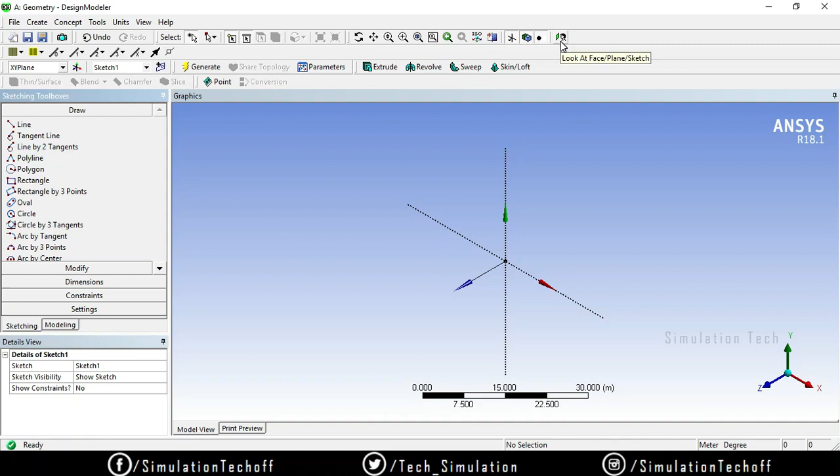Before that, my plane is oriented into an isometric view, so I need a normal view. I have two options. One is I have an option to look at face over here, so just click over here to change the orientation into a normal mode.

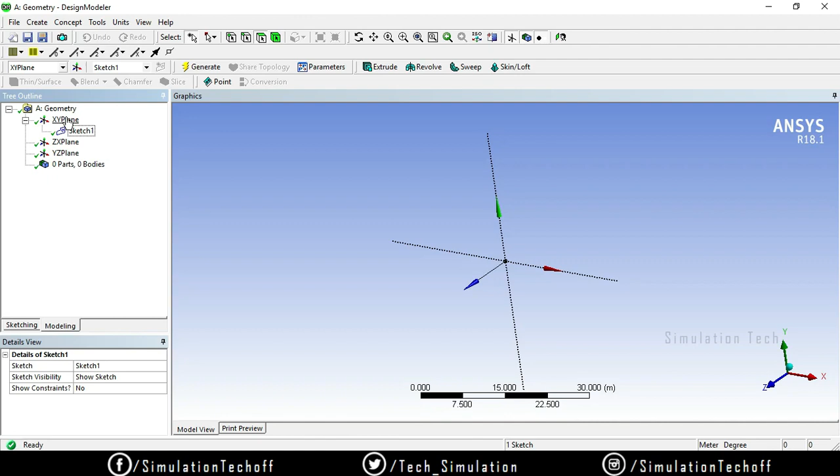Or else, if you have another orientation, just click the perpendicular axis. Here my perpendicular axis is the Z axis. Just click on the Z axis and you can get your normal position. Or else you can go to the modeling tab, click the plane, right click, and you have an option called 'look at'. Either method you can use to get your plane as a normal one, and go to sketching and click on line.

A single line command is used to make a single line segment, like so. I can draw this line using two methods. One is the normal method: starting point and ending point, starting point and ending point.

Or else I can use the drag method: starting point, drag the line, and release the button you pressed on your mouse. You can draw multiple line sections this way. This is called the drag method, so however many lines you need, you can draw.

One more thing to notice is whenever I place my cursor over the axis, you may notice a symbol called C, which means this line will exactly coincide on that axis. So I can coincide this line on this axis and then end it over here - that is also possible. That's why it shows the symbol called C.

C means coincidence. Whenever you place your cursor over a point, it prompts you with a symbol called P, meaning that particular line will coincide on that particular point. That's why it shows as a P - that is called point snap. This is called coincidence.

Another thing: whenever you draw a line that's slightly horizontal, it shows a symbol called H. If you release your cursor, it forms a horizontal line with no deviation. Similarly, if I make a vertical line, it shows a V - meaning however the line may be distracted, when I release my cursor it should be a vertical line, because the V symbol gets added, indicating the line will be created as a vertical line, or else it's created as a horizontal line.

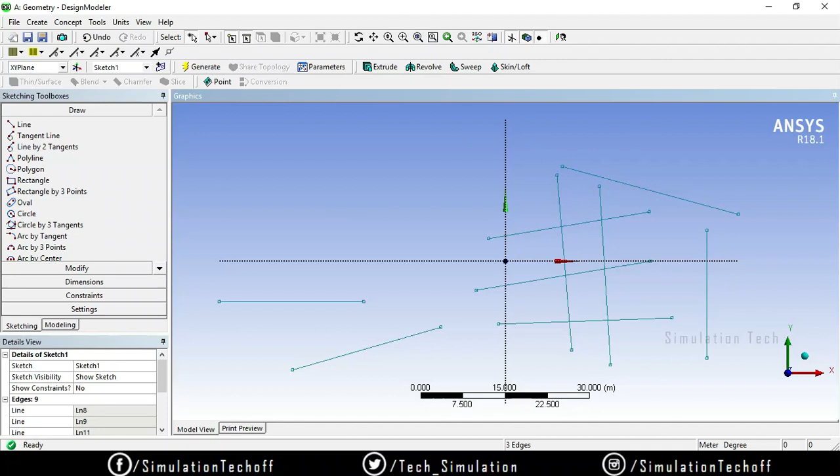If you want to delete the whole items, go to the modeling tab, select the whole sketch, right click and delete. It prompts you to delete or not, so just say yes, and the whole sketch entities will be deleted. Then select the plane, say new sketch, and come back to that sketching option. Here you have an option called tangential line.

For a tangential line you need a curved surface or a circle, so we have an option called circle. Whenever I click the circle option, it prompts me to select a center point, which may be whatever point you need. Just randomly select the point, and then select the radius or diameter of the circle.

After drawing the circle, you can change the dimension value using dimension tabs. We will see how to change the dimension values in our upcoming session. So just follow the functionality of the tools which takes place in draw tools.

So I have a tangential line option. All I need is to select a single point over the circle, and after that give the length of the line. This line should be exactly tangential to the circle at that point. Whatever point you select, a line will be created which is tangential to the circle at that particular point.

Okay, so line by two tangents. For that you need two circles. If you want to create a line which is tangential to two circles, that is also possible.

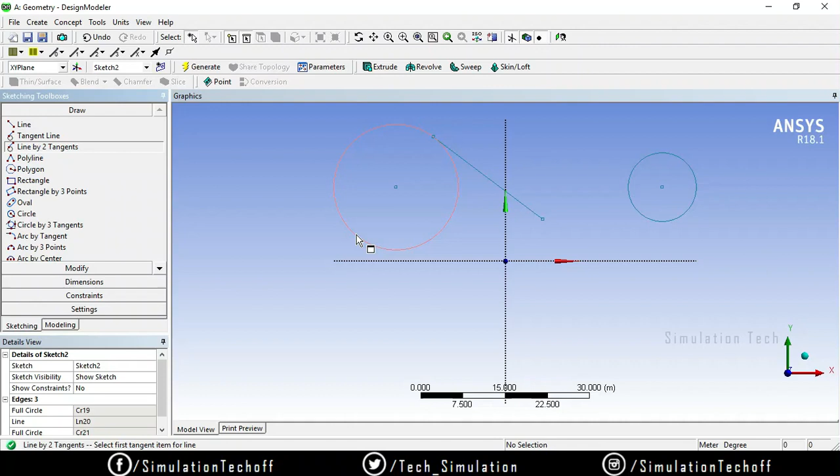So I can go to circle and draw another circle over here. I want to draw a line from here to here which is tangential to this circle and this circle. I can go to the line by two tangential option. It prompts me to select the two curved surfaces. So this is my first curve and this is my second, and after that it creates a line which is tangential to this circle as well as this circle.

And the next option is polyline. A polyline is used to create multiple line segments. While using a normal line segment, I can only create a single line, so I cannot draw a continuous line segment. For that we need the polyline command option.

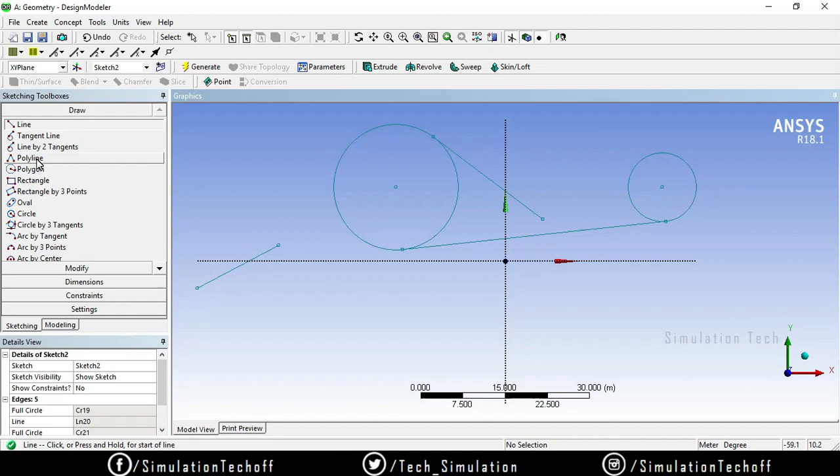Before entering into that, I just clear all the sketches over here. Right click and say delete, so the entire sketch will be deleted. After that, just click on the plane and say create a new sketch. Go to the sketching option, polyline.

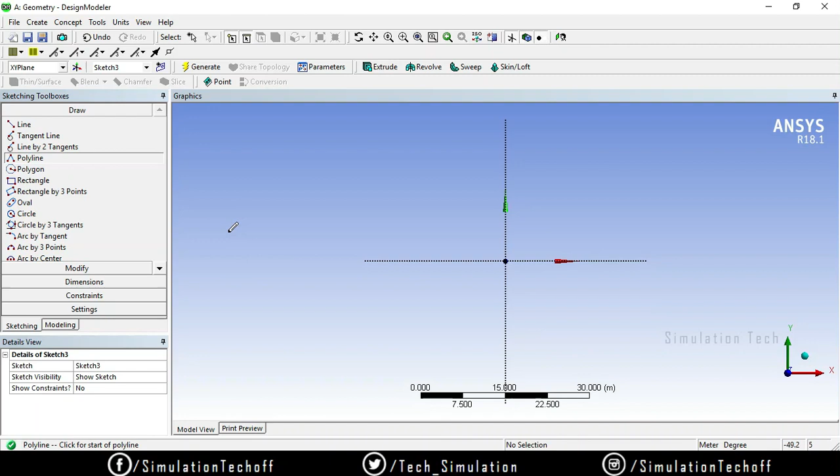Okay, so look at face. From here you can create polyline segments. So again you have two options over here: either you need an open end or a close end.

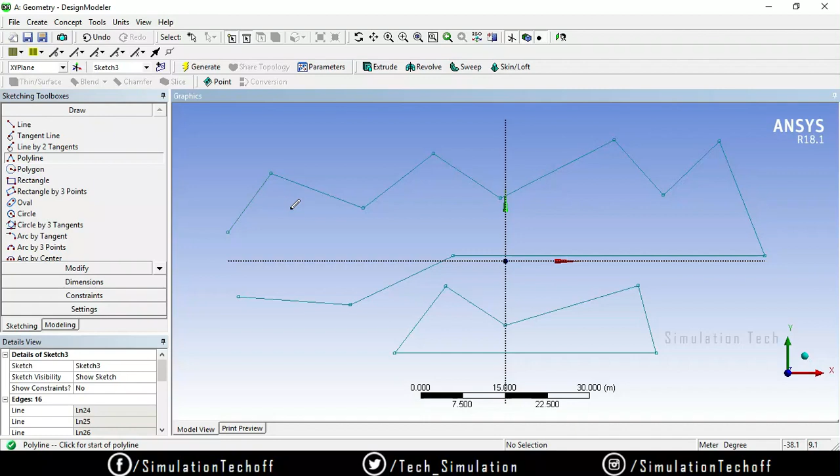An open end means this sketch is not closed over here. A close end means wherever the sketch is started, that sketch will be enclosed as a closed loop. For that you need to right click and you have two options: one is open end and another is closed end. Right now I need an open end, so if I say open end, the sketch will end over here. If I say right click, closed end, that sketch will be closed exactly where the point actually started. So by this way you can select either one way, either a closed end or an open end.

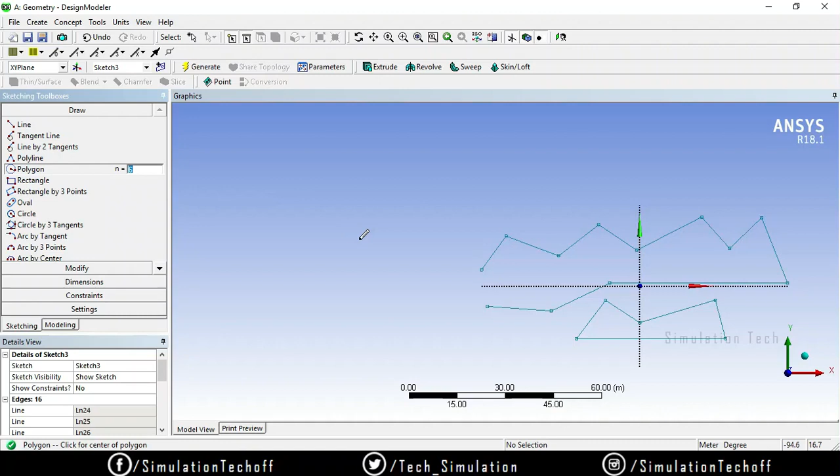After that you have an option called polygon. A polygon can have three sides or more, so whatever the number of sides, you can set it from here. By default, 6 is given. All you need is click the center point and okay, so a polygon will be created. If I change the value to 10, a 10-sided polygon will be created. The maximum sides you can give here is 36.

You can't go beyond the 36 value, because if you go beyond it, it will be converted to a circle. See, this polygon is created with 36 sides, but it still looks like a circle. In AutoCAD itself you can give up to 1024 sides, but in design modeler it prompts you to select up to 36 only. So that is all about polygon.

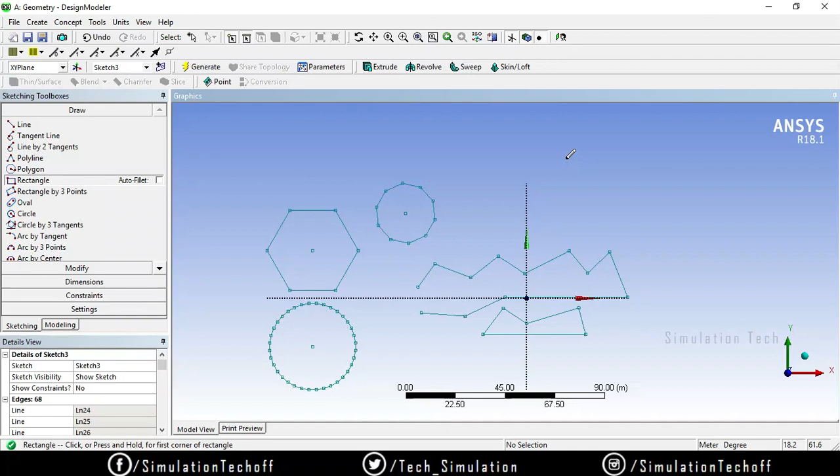The next option is rectangle. This rectangle option is a 2-point rectangle, so you need to select 2 points - this is my starting point and this is my end point. Or else if you need an auto fillet option, you can check the symbol and say this is my starting point and this is my end point. If you move your cursor you can adjust the fillet size of this rectangle, either increasing or decreasing it.

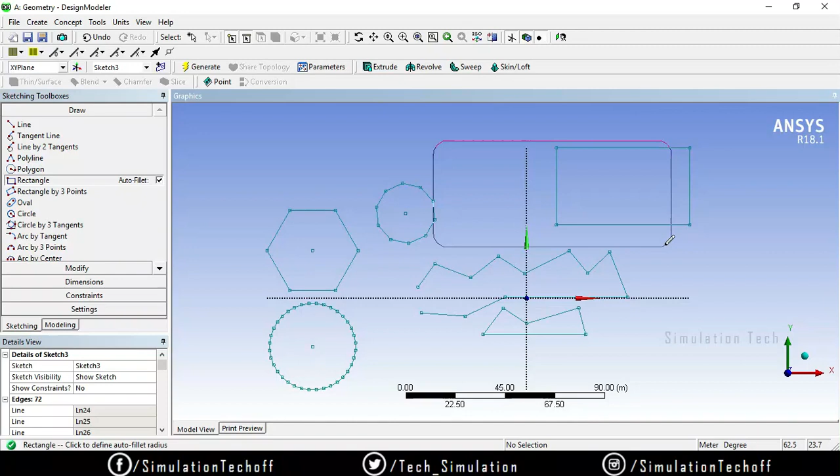After creating the fillet, you can change the fillet values by using the dimension option. That will be covered in our later session, so don't bother about it for now.

The next option is rectangle by using 3 points. Now we have created a rectangle using 2 points, so how to create a rectangle using 3 points? This is my first point, this is my second point, and this is my third point - so by using 3 points you can create a rectangle. Here also you have an auto fillet option; if you want you can use that, otherwise you can neglect it.

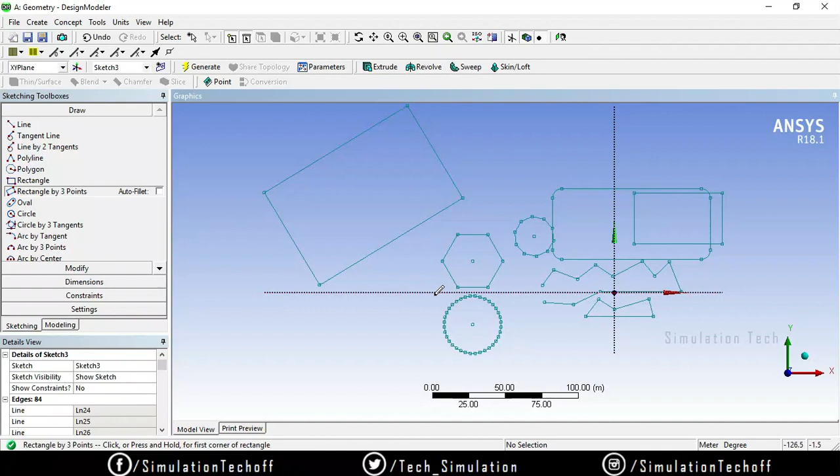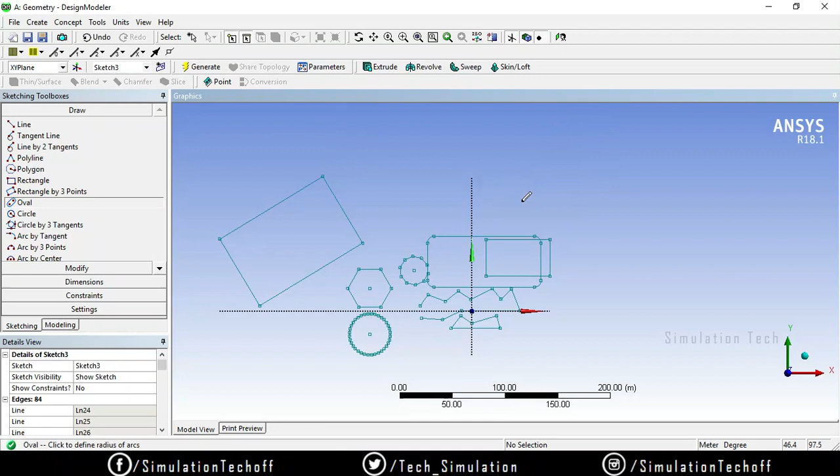The next option is oval, or else you can say slots. This option is very helpful whenever you need to make slots - most mechanical components need slots. For that, first you select 2 points, that is the length of the slot, from here to here, and then you create the size of the slot. If you move your cursor you can adjust the size of the slot. This is called the slot option.

All you need is point 1, point 2, and point 3. And you guys are already aware of circle - if you select the circle option, you need to select the center point and the outer radius or diameter.

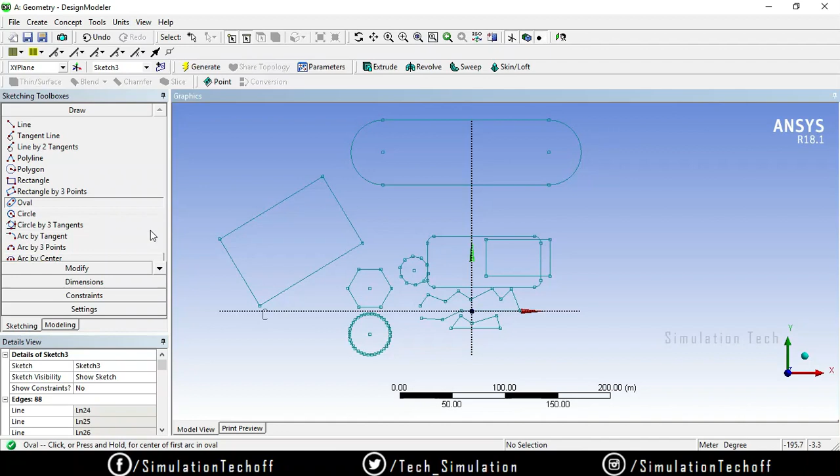The next option is circle by 3 tangents. So how can I create a circle by using 3 tangents? For that we need 3 lines. I can go to line segments and by the drag method draw 3 lines - line 1, line 2, and line 3 - and then go to circle by 3 tangents.

All you need is to create 3 tangential lines - this is my first line, this is my second line, and this is my third line. A circle will be created that is exactly tangential to the 3 lines - this line, this line, and this line.